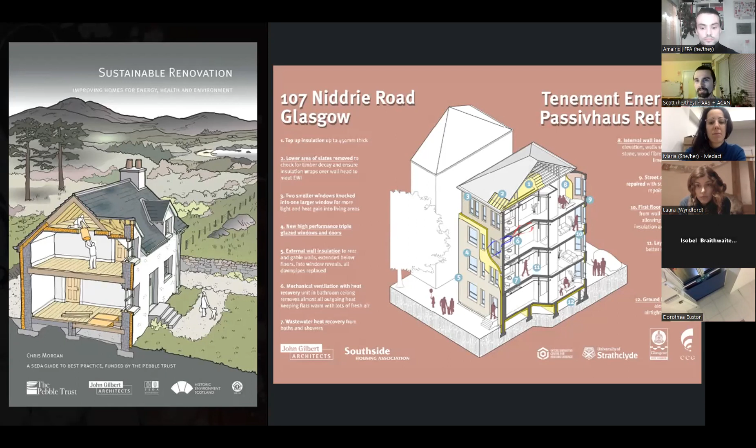Retrofitting is also about improving the energy systems in a building, how it works in terms of water, and it can be about repair as well. Retrofit usually begins with maintenance - it's a massive maintenance issue. But these are very different things, and there's no single solution we can apply to every building to make it all work the same way, because then we'll have unintended consequences of buildings performing differently.

This ties into fuel poverty very heavily, because in the UK we have some of the worst housing stock in Europe. We've seen this in recent years - two winters ago, thousands and thousands of people died as a direct result of cold homes. Every single person who passes away from fuel poverty is an entirely avoidable death.

We know that the existence of fuel poverty in 2024, when we have the technologies we have today, is an entirely political decision. This should not be happening. Fuel poverty would not exist if politics was to change its mind and act in people's best interests.

While I was putting together another presentation, Retrofit Reimagined, Rishi Sunak scrapped the Energy Efficiency Task Force. So the government is actively hindering its own already lackluster response - as it's developing a response, it's making that response worse. This task force was barely around for 6 months before it was wound down and made useless.

When we look at government schemes in the past, lots of people have had negative experiences when given a one-measure home improvement that wasn't carried out properly - there wasn't a proper duty of care exercised by the government. The most recent scheme, the Great British Insulation Scheme, was calculated to take 300 years to meet the government's own targets.

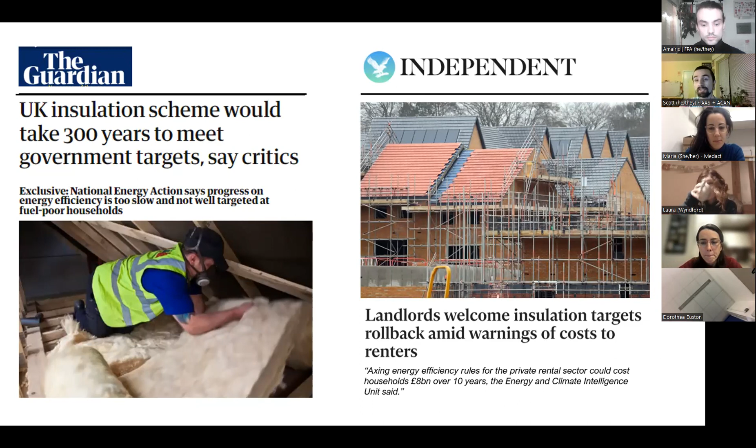The insulation targets were also rolled back. It's been calculated that over the next 10 years, with these being taken away, renters are going to pay an extra £8 billion. Again, we have the technology for that not needing to happen. The political landscape is making things worse than they already are.

But at the same time, retrofit could be transformational climate action. Because of the impact of the built environment on climate change, if we retrofit and improve buildings, we can do some incredible things. That's something that gives me a lot of hope - what's actually possible.

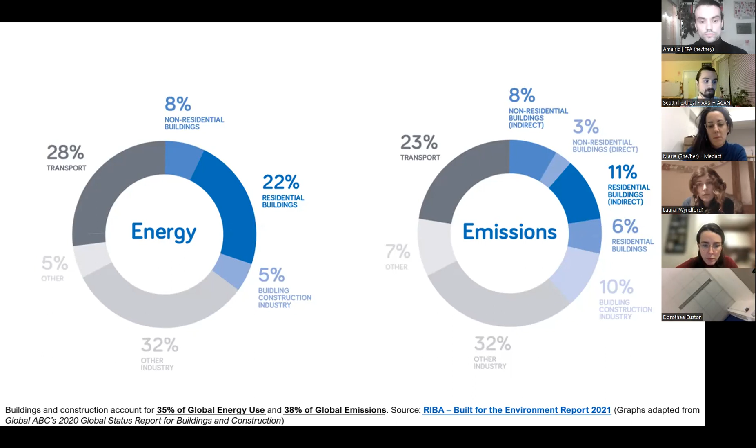Roughly 40 to 50% of all carbon emitted on the planet is around buildings, construction, operation, and maintenance. So that's a huge impact, and a very negative one. But if we actually looked at it as an opportunity, it's pretty much dreamlike. It's incredible what we could be doing. And the urgency of this could not be higher.

We were also told last year that by 2026, the UK and EU27 construction sector is going to blow its 1.5 degrees carbon budget. So we know that on the trajectory we're on, we're going to use up our fair share in the UK, and everything used beyond that is essentially colonisation afresh.

We also know that 80% of the buildings we're going to use in 2050 are already standing, and it saves about 50 to 70% of carbon emissions if you retrofit a building instead of knocking it down and rebuilding it, even to the highest of standards.

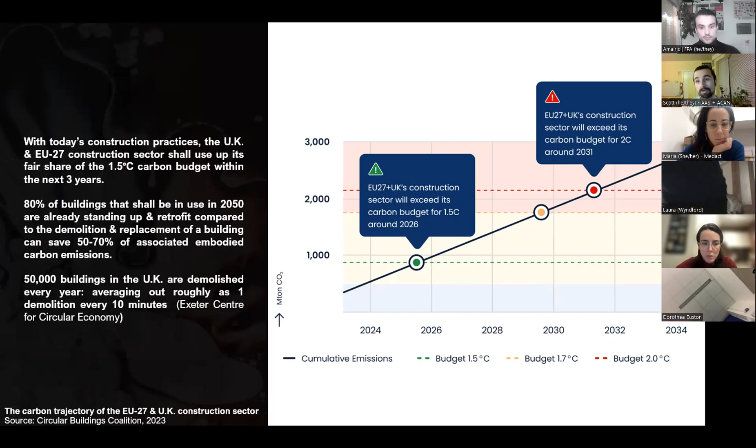We also know that in the UK, 50,000 buildings are demolished every single year. If you average that out, that's about 1 every 10 minutes. So by the time this finishes, about 12 buildings will be knocked down on average. That's just to put into context how many buildings we are wiping out when we're in the middle of a housing crisis. And the UK's housing stock is really clearly, visibly some of the worst performing in Europe.

On average, a UK home loses 3 times more heat overnight than homes in Germany, and about twice as fast as homes in Italy. So we have the worst performing housing, and we know this. There is no way of sidestepping this in terms of policy. We could change this very easily, but it's simply not being taken seriously.

We have a culture that does not guarantee the maintenance of buildings. We have a legal system that does not guarantee the maintenance and upgrade of buildings either. This ties into fuel poverty and health very strongly in the UK, because as the weather changes and gets hotter in the summer, wetter in the winter, our buildings are not prepared to be durable and to last, or to perform healthily or comfortably in those conditions. This is of the utmost urgency in terms of not just fighting the climate crisis, but looking after public health as well.

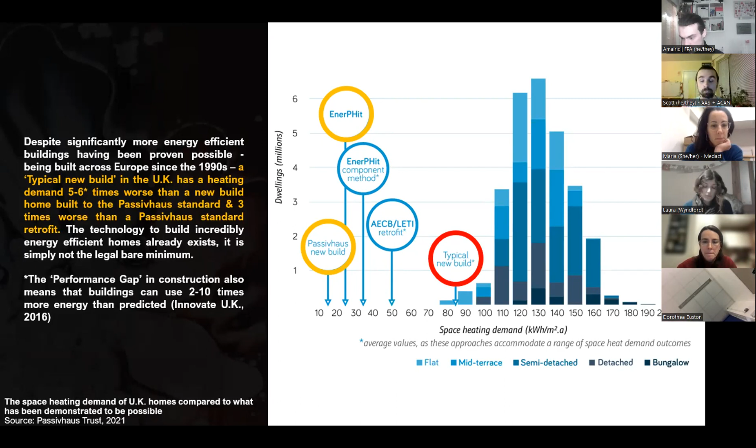It's already being done across Europe. We have some cases of it in the UK as well. And to be incredibly blunt, because we have to stress this every time, retrofitting homes literally saves lives. This is in no way hyperbole, this is not an exaggeration. And even though we know retrofitting homes saves lives and that our standards are not very good in the UK, the government has chosen to actually reduce the standards in their new future homes plans. They're going to get worse.

It's already been calculated by the BRE that if all of the remedial work we know needs to be done on our housing was carried out, it would pay for itself back in the full societal cost within 1 year. We know that poor housing is costing the NHS £1.4 billion. If all that retrofit work was carried out, it would pay itself back in 1 year only. Our government has known this for 2 years and has not acted on it accordingly. But great research has already been done to see where the costs of poor housing are felt, and that's everywhere from high bills to transportation, wider systemic costs.

I'll send along some stuff on this afterwards, because this alone could be gone into for days.

To make that succinct, it's been worked out that 40% of any nation's healthcare costs are directly attributable to its built environment - what it's built from, how it's maintained or not maintained, and if it's upgraded or not. So 40% of what our NHS spends is entirely down to the built environment around us. And that can be changed. We know we've got the technology to change that.

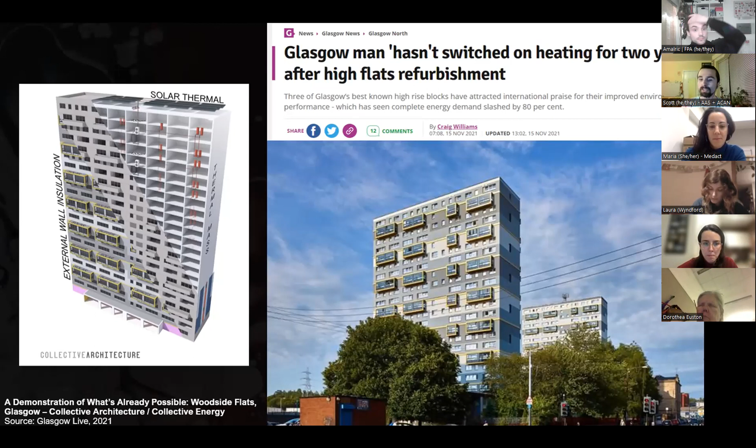In ways this could be done differently, we really need to start looking beyond the individual home scale, because all of our government policy is basically dictated around households, not around collectives. So it's looking at house by house by house instead of street by street, block by block, neighborhood by neighborhood. We really need to flip that. But we also need that shift from the individual to the collective. And at the moment, we get schemes that last a year.

And if the money isn't spent, the government takes it back. We need to start looking far into the future with this and avoiding the extractive business models that we've seen, where people are pushed into things without being given proper protections.

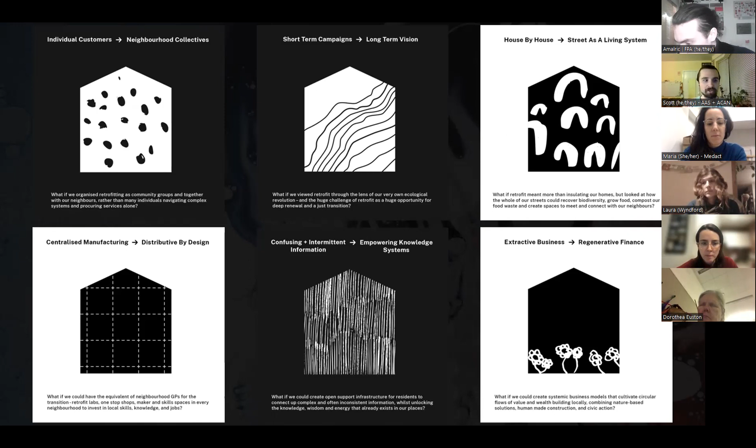Again, all of these are an hour-long, very happy chat in itself. I'll just keep on going and we can talk about them later.

But just to put that in a scale of how many jobs retrofitting could create, how much needs to be done: the Passivhaus Trust calculated that in 2020, we needed one retrofit completed every 35 seconds. It's probably much shorter now because we haven't done that properly.

So if people were to be employed full time doing 500,000 simultaneous retrofits, we would need 2 million people employed from now until 2050. That's a workforce half the size of the NHS, of good, well paying, sustainable, consistent jobs.

If they were unionized jobs, it'd be dreamlike, it'd be magical. But that's 2 million people, and only 135,000 people were in that field in 2020.

So we have 2 million jobs that we know need to be done if we want to hit our climate targets in 2050. So what does that look like in terms of comparing it to other industries?

For every one person employed in oil and gas in the UK in 2020, there were 3 potential jobs in clean energy and 77 jobs in domestic retrofit that needed to be done. So for every one job in fossil fuels, there's 80 jobs in renewable energy and domestic retrofit.

That's not even looking at the retrofit of our infrastructure, public buildings, etc. That's just housing. So for every one job in fossil fuels, there's 77 that needs to be done if we want to hit our climate targets.

And that would transform lives across the United Kingdom. So that's me trying to end on a happy note.

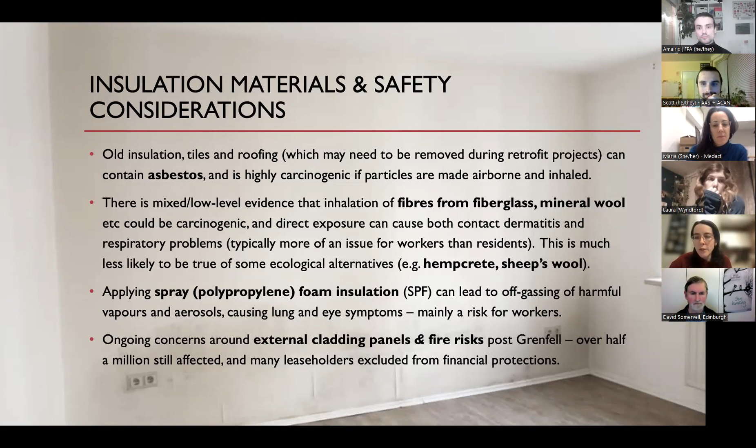So there are many different levels and types of risk here, a lot of them in theory manageable, but all needing quite a lot of care - particularly how do you ensure there's the right regulatory environment, how do you ensure workers all have the right training and protections, and that hasn't always happened in the past with some of these things. So can we ensure with our campaigning that worker health and safety, and regulation around fire safety, are things we think about as well. I suppose that's some of the ask.

On the question of cavity wall insulation, just to mention this briefly because I touched on it here - some of the harms with cavity wall insulation might relate to issues of poor policy design and implementation.

Now, a lot of people with cavity walls have suffered significant issues where it's gone wrong, or potentially been installed in places or ways that reflected poor training or not being assessed well. Where it went wrong, they didn't have adequate protections and redress to put it right, and have been left massively out of pocket, or in homes that are really harming their health, and they can't get out of those or address the issue.

Civalli is a campaign group of people affected in this way, who've spoken to MPs and got things into the media about the issues they've been facing, some of these individual stories. I've got a screenshot of one of the people affected in this way. I won't go into the specifics, but it's just to flag the kinds of things that can happen when installation does go wrong. That's certainly not always the case, but it is a potential risk. These are complex interventions that do need care, basically.

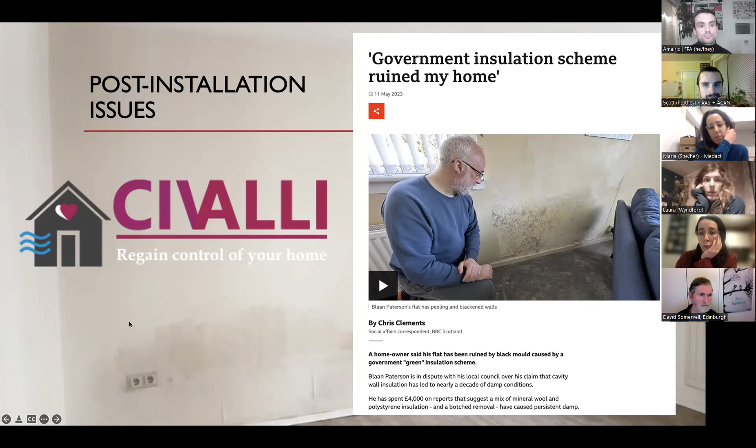So yeah, housing is a human right, and I will hand over to Maria for more of the campaign side, and to explain Health for a Green New Deal's side of this.

Thanks, Izzy. I'll try and be as brief and quick as possible so we can have more of a discussion and chat as soon as possible. But one of the key questions of today is how we organise ourselves in our communities. I'm just going to suggest some of the ways different campaigns can use health, but also how the health community can be part of campaigning for retrofitting.

Firstly, using a health framing has been proven to be really powerful when talking about the climate crisis in general. We've definitely seen this in Health for a Green New Deal. The reason for this is that it makes issues more relatable to people's everyday material experiences. People really care about their health and in turn are more motivated to take action.

For example, one framing you could approach this issue with is that leaky homes and our current energy system are making us ill and costing the NHS millions, arguably billions, depending how you measure it. The responsibility should not be on our health system and health workers to resolve the impacts of the housing crisis. This is a political issue, and political decisions are being made that are leading to the cost on the NHS and the deaths we are seeing. The solution isn't pills. The solution is giving people healthy homes, basically.